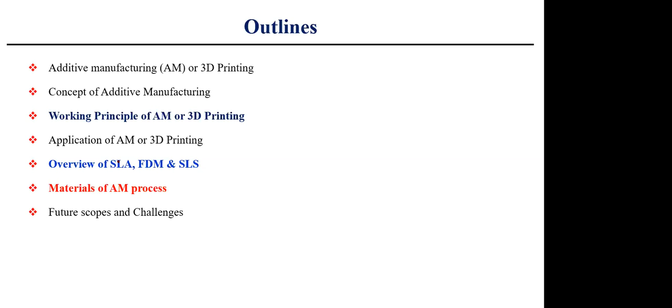Moving forward, the definitions. I hope this definition may have already been shared by other experts in the morning session. So let me just give a brief summary of what additive manufacturing is.

Basically, additive manufacturing is a manufacturing method or technique or process wherein we produce parts or develop products directly from CAD models. That is what we basically always say in the definition. Yes.

So here what we are basically doing is we are developing the model, so that refers to what is basically additive. How did this additive come into picture? Because the main idea of additive manufacturing is that we are adding the materials rather than subtractive. In most manufacturing systems, whether conventional or non-conventional machining processes, we always get products by doing some processes which remove the materials. So to get the finished products, in the case of lathe machine, drilling process, welding...

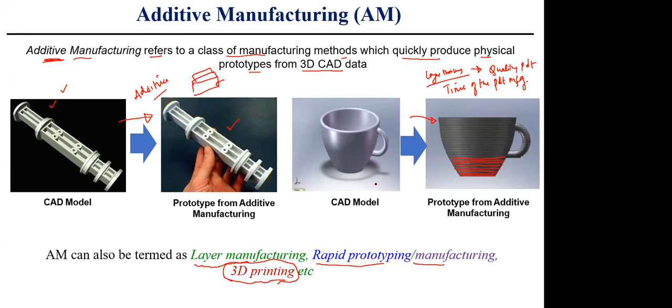So when we compare this particular new technology called additive manufacturing with conventional systems, the conventional systems may be lathe machines, milling, drilling process, welding process or sawing process, where we get the final products by removal of different materials from the objects.

Let's take this example figure shown in the PPT. This is a steel component used for carrying load applications. If you want to manufacture this object using conventional or non-conventional manufacturing systems, you require removal of some materials, meaning you need to remove materials to get the shape.

Like this shape, you also need drilling operations to put a hole. So whatever operations you perform on this simple component, you are removing materials and finally obtaining the final shape. When used in real practice, it carries the same load which you are expecting. That is what conventional systems are concerned with.

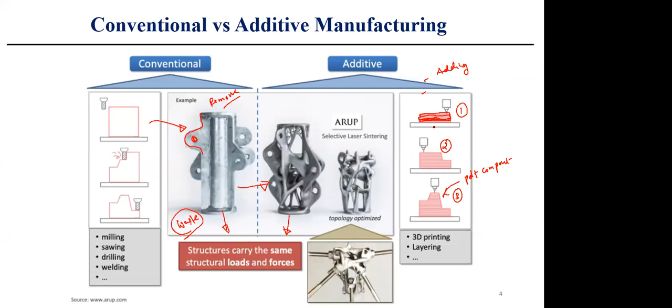The second point is wastage of materials, which we get after doing the process - we remove materials, and that removed material is waste, which is a burden in terms of cost. So that is scrap, there is waste. But in additive manufacturing systems, there is no scrap. Sometimes, if there are hollow parts, support materials are needed to develop the product. That support material is extra material needed for objects with hollow sections or some complexity.

So now, where did this concept of AM arrive from? How did the concept of additive manufacturing come into the picture? As we know, we used to do printing in everyday life.

That printing is a 2D form - a normal printer will print in what is called 2D form, meaning in X and Y directions. The concept came from the printer, which can print in X and Y direction. But only additive manufacturing systems print in the Z direction - the printer cannot do that.

In the printer, it cannot do the Z direction. It can only print the X and Y directions. That means the sketch which is on the 2D sections in X direction, Y direction can be printed. So with that, the concept of printer has arrived.

When a particular printer is able to print the material, basically 3D printing means, as the name indicates, it is printing the materials, printing the object, or printing the sketch. As the printer does the same thing, whatever you send the sketch, it prints on the 2D paper, isn't it?

So from the concept of the printer, it was thought to give another direction of printing, that is the Z direction, the height direction of the part. So with this concept of adding the height direction printing, the additive manufacturing came into picture.

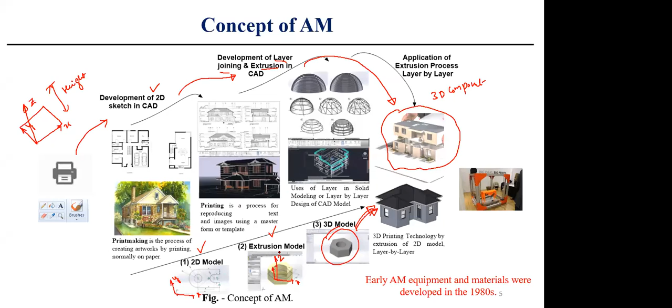The first step, in any additive manufacturing technology, is the development of the CAD model. Yes, definitely, because the input required for this technology is the model. That model is a computer aided design.

That means you are developing the computer aided models using certain software, that we call 3D software or 3D development software, like Unigraphics, SolidWorks, ProE, maybe I-DEAS, and there are several 3D modeling software. With the help of that, whatever type of design you require needs to be modeled first, needs to be designed in a particular CAD software.

Once in the CAD software, one cannot send directly to the machine, because there are certain essential steps to be followed, called the pre-processing steps before sending to the machine. So what are those? The second step is the STL conversion. That is nothing but a kind of translator or mediator which helps the compatibility between the software language and machine language.

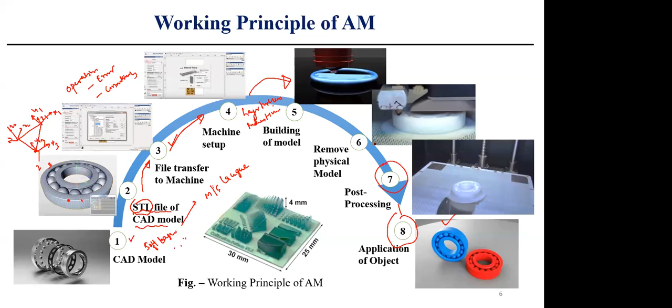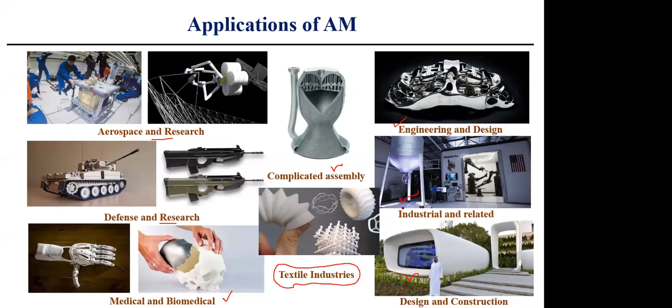We find applications of additive manufacturing in complicated assembly parts, even the textile industry, because most textile industries use the concept of additive manufacturing. Engineering design applications, wherein we carry out various types of pre-analysis of any design to take the decision whether it is feasible or not. Industrial related activities, design and construction activities, and so on. Even in the construction area, these days the concept of additive manufacturing has already been implemented.

But in most cases, if you talk about the physics of the process, it is more or less similar - what is called the same principle. The physics means adding the materials. That is the basic principle.

The source of energy might be different, but in most cases we use a laser as the source of energy to fabricate the parts. The size of the prototype depends on the size of the machine - if the build size is very high, larger products can be manufactured; if the build size is very small, smaller components can be produced.

But the one parameter which varies in almost all additive manufacturing systems is the type of material. Definitely, because different types of materials make the differences in additive manufacturing technologies. Hence, since material plays a significant role in additive manufacturing systems, 3D printing has been classified based on the type of materials.

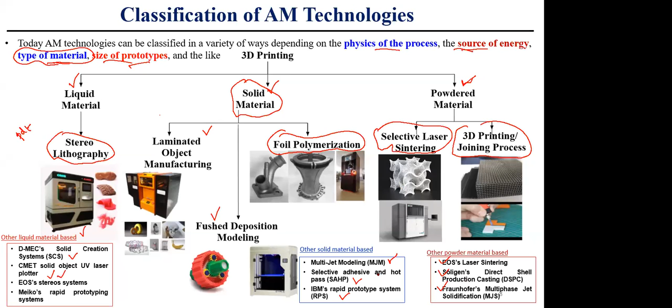Among 3D printing technologies, laser SLS printing is used in various applications. It's a user-friendly process where products are made faster and can be used directly as functional products in real practice, like other 3D printing joining processes such as binder jet process. All these processes take powder form input material to get final products, like EOS laser sintering, direct shell production casting, and multi-phase jet solidification. All these technologies come under powder based additive manufacturing.

Let me tell you briefly about the majorly used 3D printing technologies. One is from the liquid side, another is the solid side, and another is the powder side.

Coming to the liquid side, the most commonly used is the stereolithographic method of 3D printing, commonly called SLA. It was developed as early as 1980. The concept uses an ultraviolet laser for developing the product, and photopolymer resins are used, which are in liquid format. These liquid resins are kept in a particular chamber.

The laser is transferred over what is called the machine zone. When the laser is transferred, the liquid resins melt and solidify, and printing starts layer by layer upon each other. Once one layer is finished, the table moves downward to settle for the second layer, and finally once the entire model is ready, it is removed. Most photosensitive polymers are used for making the finished product.

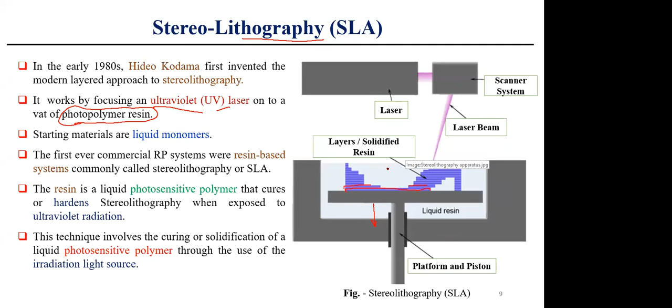Let's see how this particular technology works with this video.

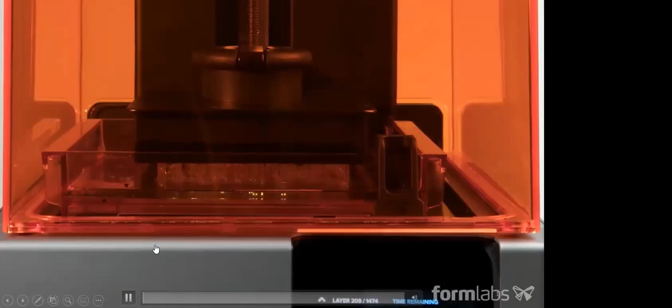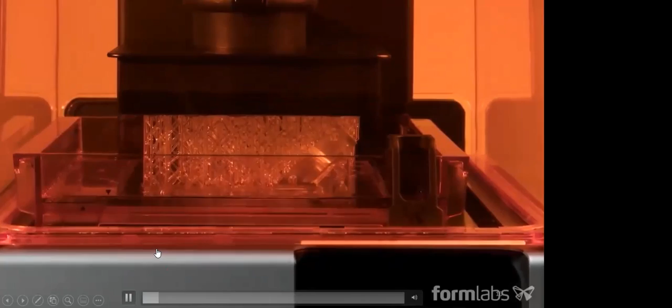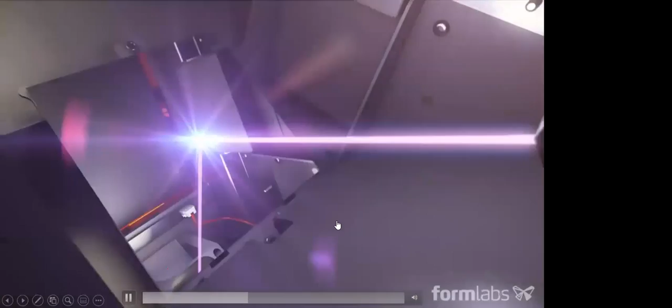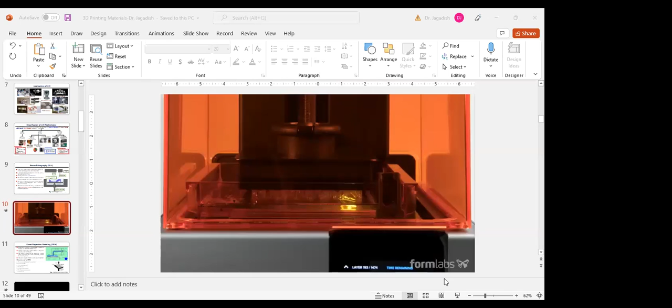Is this sound audible? Yes sir, okay it's okay sir. So this is basically a liquid resin system - this is the liquid polymer resins, and these are the components. It is lowering the build platform. Sir, the video has no sound, sir. Okay, one minute, I'll share it in a different way. Share the sound - yes, now I'll share. I hope now it is coming.

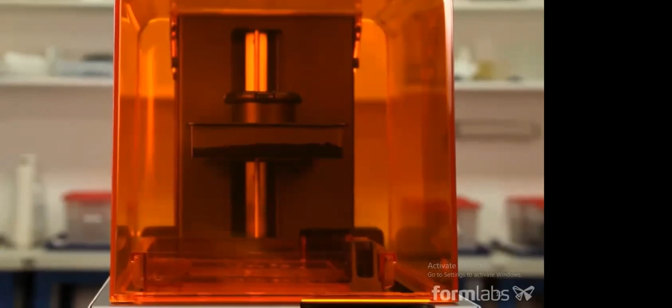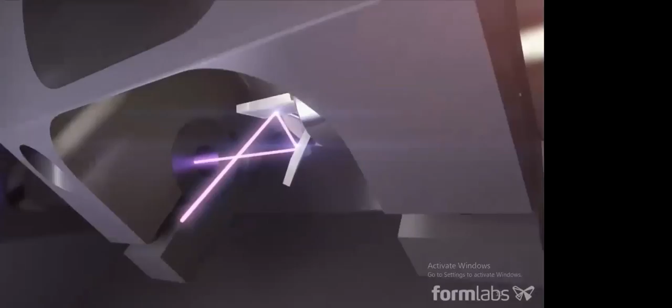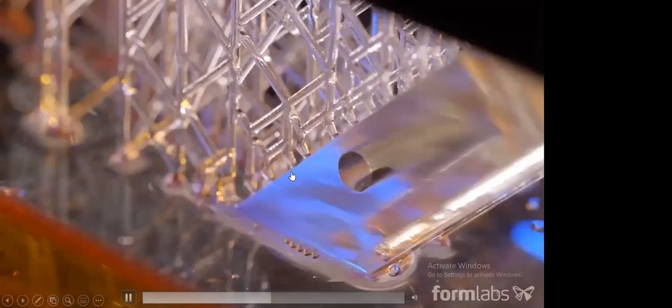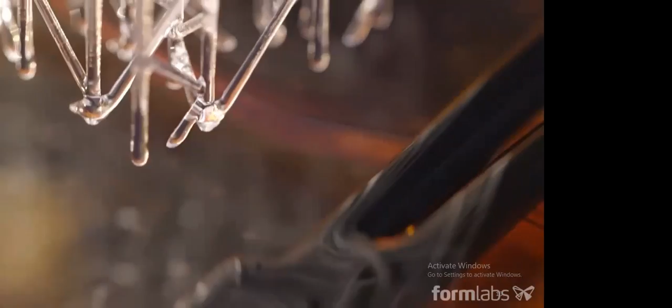Uses a UV laser to cure liquid resin into plastic. Upside down or inverted, it is the most common SLA system. Depending on the machine, resin is either poured into a tank by a user or dispensed automatically from a cartridge. At the beginning of the print, a build platform is lowered into the resin, leaving only a thin layer of liquid between the platform and the bottom of the tank. Galvanometers direct the UV laser through a transparent window at the bottom of the resin tank, drawing a cross-section and selectively hardening the material. The print is built in consecutive layers, each less than 100 microns thick. When a layer is complete, it is peeled from the bottom of the tank, letting fresh resin flow beneath, and the platform is lowered once again. Originally developed in the 80s, SLA was confined to large industrial machines until recently.

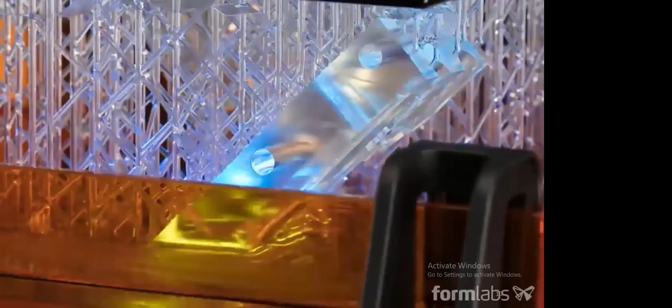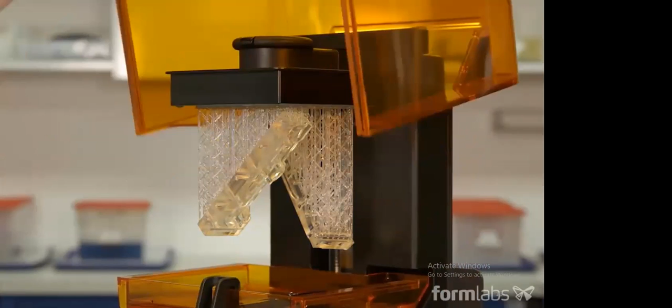Today, desktop stereolithography offers affordable, high-resolution 3D printing that fits conveniently in your workspace. SLA allows for the use of a wide range of materials with diverse physical properties, whether you're an engineer, product designer, sculptor, jeweler, or dentist. Finally, the product has been removed, and there are some supporting materials which later, in post-processing stage, we remove to get the final product.

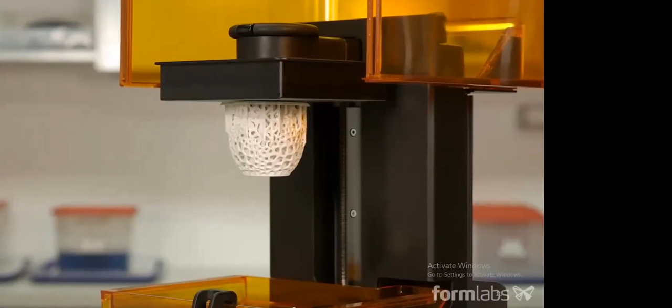Moving forward, the next most commonly used technology is called the FDM process, that is fused deposition modeling, wherein solid material is used to get products. It comes under the category of solid based models. This technology or machine was developed by Stratasys, one of the known companies in the USA. Here filament windings are used - the material is in the form of filament as a wire, fed into the heating chamber through rollers.

There will pass to the FDM head, wherein various heaters will be provided to get the products or the filaments into liquefied form. So when the wire roll is entered into what is called the head, the materials get liquefied, and then the nozzle starts extruding the material, or depositing the material over the surface. So again, similar concept here, adding the materials layer by layer.

Once one layer is over, the table will move in the downward direction, and the second layer will start, and the third layer, and so on, until the entire product is developed.

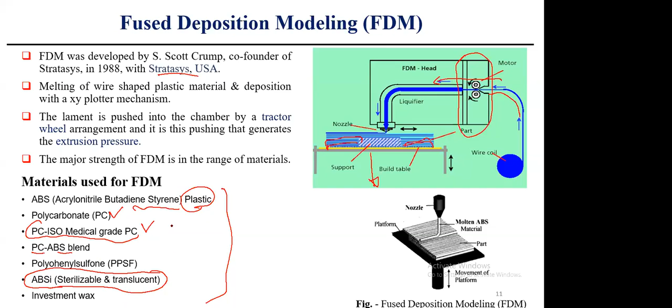So I just want to show the working principle of how it is.

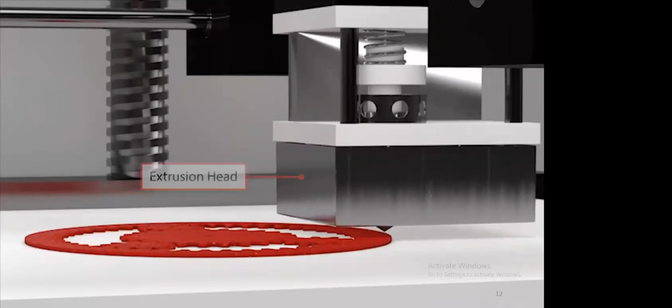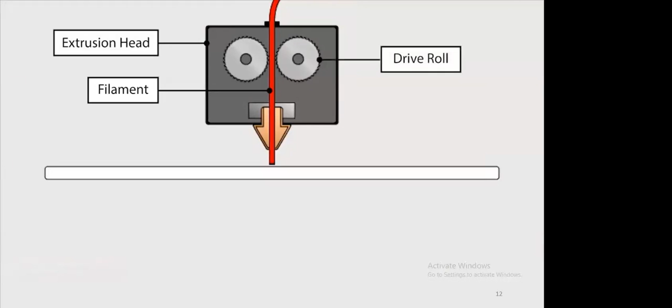Material extrusion, also known as fused deposition modeling or fused filament fabrication, is one of the most common and widely available AM methods. Material extrusion systems use an extrusion head with a nozzle to deposit build material onto a build platform. During material extrusion, a filament is fed through the extrusion head by a drive roll and past a heating element. The material liquefies and is then deposited by the nozzle onto the build platform.

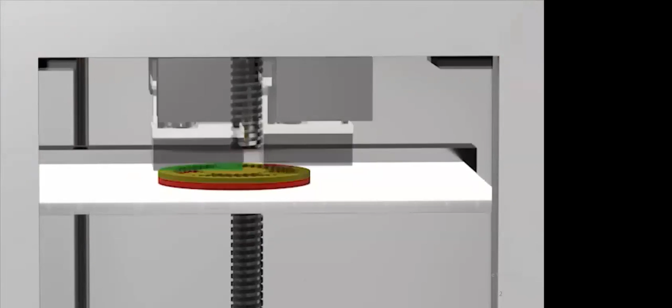The extrusion head moves horizontally to selectively dispense material in the shape of the desired part layer by layer onto the build platform. The build platform, which usually moves vertically, lowers so the nozzle can dispense a new material layer on top of the previous one. Once one layer is completed, the table moves downward, and each layer solidifies and joins with additional layers. This process repeats until the final product is complete.

Another very important method normally used in most industries is selective laser sintering. The concept involves sintering powder materials through a laser, or heat source, through which the development of the sketches or products is done.

So as usual, the same concept applies in this technology as well, where there is a bed, but the material is in the form of a powder. In the earlier case it was filament or solid form, but here it is powder form. Various types of powders are used, such as polymer powders or metallic powders. If metallic powders are used, it is called a metallic SLS 3D printer. If polymer powders are used, that is a polymer-based SLS. So depending on the type of material, the powder is selected.

Again, the concept is the same. The principle here is a sintering process, where you are sintering the powder particles to bind the powder elements one upon each other.

Similarly, the input source is transferred over the surface at which you are going to bind the powders. That zone binds layer by layer, and once a layer completes, the table automatically moves, and the wiper or rotating arm wipes away unwanted material and flattens or spreads the powder over the surface of the sketch.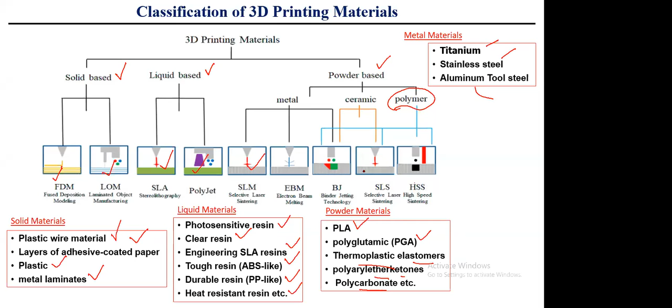That means basically in liquid materials, resin formats are used as input materials. On the powder side: polylactic acid, polyglutamic materials, thermoplastic elastomers, polyaryletherketones, polycarbonates, and so on. Some metallic materials are titanium, stainless steel, aluminum, tool steels, etc. And even other materials like ceramics, sand, elastomers, etc. are also used in most additive manufacturing technologies.

Let's see one by one the different materials which are most commonly used in 3D printing. The first and foremost is plastic. We all know most 3D printing technologies use plastics.

Various types of plastic materials are available for printing 3D printed objects. But availability doesn't mean I can use any material - depending upon the type of application, type of complexity of the product, and the need of the product, the corresponding plastic material will be selected for that particular product.

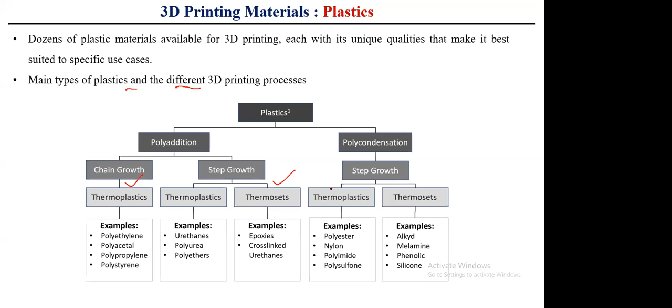So mainly, depending upon the types and different 3D printing processes, we select the type of plastic material to get printed. But in most cases, we basically use thermoplastic and thermosetting plastics only in most 3D printing technologies. The first is ABS material.

As we all know, ABS is acrylonitrile butadiene styrene. This is a very commonly used plastic material in the form of filament as well as in granule form, used as 3D printing material in 3D technologies.

Why? Because it has good impact resistance properties. Wherever you need good impact resistance, one can use ABS material. It also provides good strength and moderate flexibility, and is easy to extrude from the printer nozzle - that's one of the plus advantages of this particular material, ABS.

As you can see in this figure, it looks like this in the form of filament as well as sometimes granule form. The temperature range it can withstand is around 210 degrees centigrade, up to 250 degrees centigrade on the high side.

Most applications include printing of plastic automotive parts, moving parts, musical instruments, kitchen appliances, electronic housings, various toys, etc., where this ABS material is used. Other applications include traditional manufacturing like plastic wrap, water bottles, cups, and so on. These are the applications where ABS material is used.

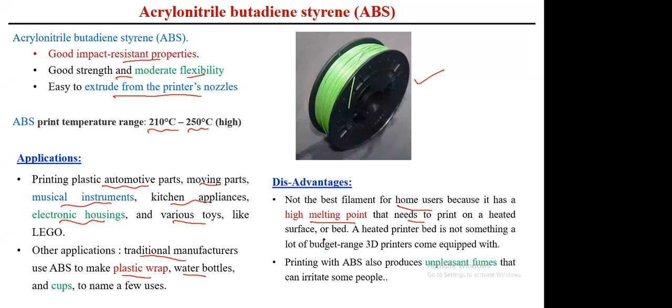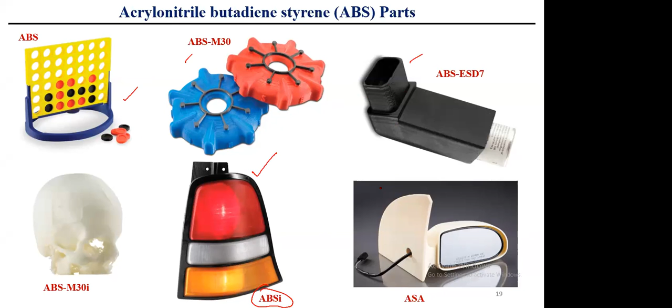These are some branches of components produced by ABS plastic. This light component is made by ABS. It is a special type of blending of ABS with other components to enhance strength. So like ABS pure, ABS M30, these are covers, and this material is ABS ESD7. There are various grades of ABS used for making different products for different applications.

Next is PLA. PLA is another important material most commonly used in most applications, in most areas. Why? Because it has advantages like good impact resistance, good strength, and moderate flexibility.

It is very easy to extrude through print nozzles. That is one of the beauties of this material. The temperature it carries is around 180 to 230 degrees Celsius only. It looks like a filament form, but sometimes we may get it in granule form also. PLA is also used in granules.

So which methodology or technology will be used for these materials? If it is filament, one can use the FDM process. If it is granule or powder form, one can use SLS. Applications of PLA materials include medical stitching.

In medical applications, including surgical implanted pins, these pins are manufactured using PLA, along with surgical rods used in medical applications. Some small screws, mesh, or consumer items are also made using PLA. Other applications include food packaging materials, disposables, tableware, or diapers, all manufactured using this PLA.

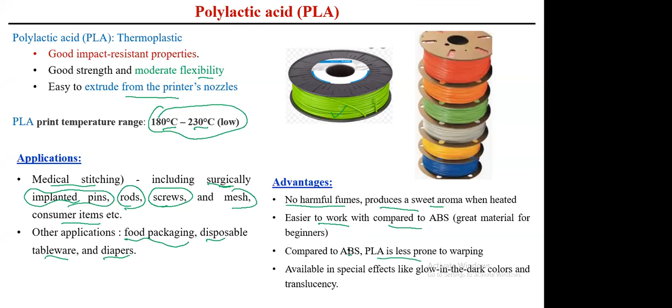Compared to ABS, PLA is less prone to warping, obviously, because it is environmentally friendly and obtained from natural resources. Hence, PLA is the most commonly used material in most applications.

The next material is PET, that is polyethylene terephthalate. This is also one of the most commonly used materials. Why? Because it is compatible with lower printing temperatures, meaning at a lower temperature there is faster production process.

Humidity and chemical resistance capacity of this particular material is compared to PLA and ABS. High transparency, one can go for food safety, meaning it can be food safe in this material. That means if you are placing any food in boxes made by PET, your food is not going to be poisoned.

So it is a food safety material, wherein your food stays in very good condition. What temperature range can it carry? Approximately 210 to 230 degrees centigrade. The applications are waterproof applications, snap fit components like cups and plates, etc. As you can see in this figure, there are various applications of PET plastics.

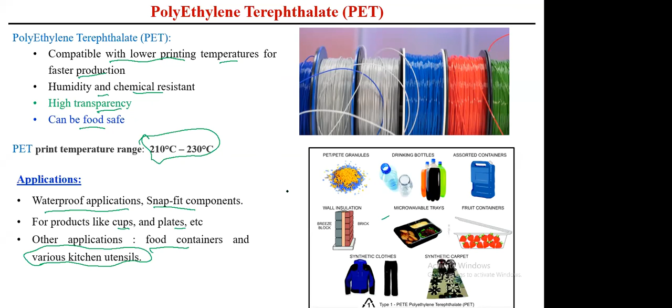Foods containers and various kitchen utensils are also made using this material. So one can say that PET material is basically used in most of the consumer side food industries. That is the beneficial side, because if you keep your food in a box made of PET, your food will not be damaged or poisoned. This PET is available in granule form as well as filament form, and it is a solid based material. Hence the FDM process is best suitable for this material.

Next is PETT, which is an additional grade of PET, where a trimethylene component is added into the PET to give a glassy filament type structure to the filaments, called T-Glase filaments. That means it looks like a glass type of thing, but it has greater strength compared to PET.

It is non-biodegradable, and this material is developed from some natural resources. High transparency, yes, when made with this, it has transparency where one can see the products inside the box or something like that. So transparency is there. This material is also best suitable for food applications, and more or less the temperature range is similar to PET, so the properties of PETT and PET are similar.

One can expect that this material will also be used in FDM, because it is in filament form, for various applications like food. It will be used for various food containers and other kitchen utensils only, because it is non-biodegradable, and hence it will be preferable to use for food applications.

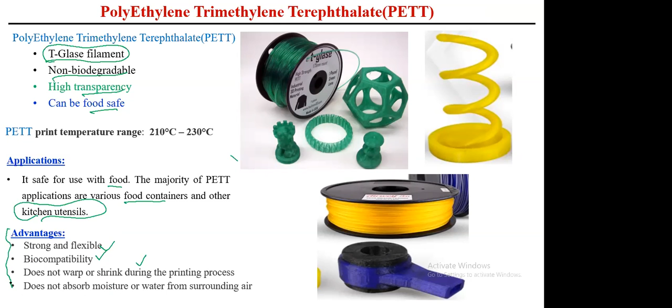So next, some of the advantages we get by this methodology: this material is very strong and flexible, biocompatible, and does not warp or shrink during printing, and does not absorb moisture and water. That is the plus point of this material. Hence, with these plus points, this material will be used in food applications, and it will be printed by the FDM process.

Another important plastic material normally used in 3D printing applications is nylon. We all come across and know about this material. Nylon is the most commonly heard of and usable material in most industries, and in daily life we use or feel products made by nylon. Why? Because nylon is a material which is very strong in nature, durable, and light in weight. That is the advantage, and also tough and partially flexible - not fully flexible, but partially flexible.

It has heat and impact resistance - when there is an impact force, it can also resist it. And it is very complex to print, meaning various complex components can easily be printed using nylon. Nylon is in the form of granules or filament form, so therefore nylon materials can be printed using the FDM process. More or less the temperature is also almost in a similar range of 210 to 250 degrees centigrade, similar to most plastic materials.

But on the higher side it may go according to the additives in the filament. Again, addition of different materials to get different grades of nylon gives different ranges of temperature withstanding. So as such, this material is also a solid based material.

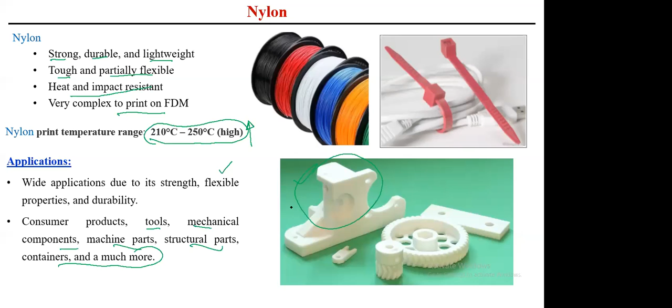So FDM process will be used for printing of some of the components. As you can see in this figure, these are some clips, some gears, some plates, some structures like a vice structure, or casing structures, printed by using nylon. If you talk about the applications, wherever you need greater strength, flexible properties and durability, in that case we should go for using nylon materials instead of ABS and PLA. Consumer products like tools, mechanical components, machine parts, structural parts, containers and many more will be developed using this nylon. So the nylon products related to tools and all can be directly manufactured and used in direct applications.

Next is PVA, another plastic normally used in the FDM process. That is polyvinyl alcohol. So as the name itself suggests, it is typically used as support material. This material is not used for printing the main part, but it acts as a support material, because some of the hollow components of the products need some support material. After producing the parts, the support material will be removed and the products super finished to make good quality. Somehow the support material is needed, and in such cases, most of the support material used is PVA.

When printing with ABS and PLA, PVA will be used in combination with ABS and PLA. PVA works best with printers that have a dual extruder, meaning two extruders are required in this case, one for PVA and another for PLA. So combinedly it will be printed. Whenever support material is needed, that will be printed by PVA, and whenever the main component is to be printed, that will be printed by PLA. So this works using a dual extruder.

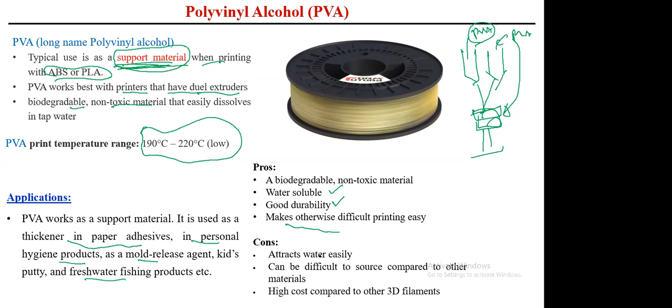Am I audible? Yes, sir. Yes, sir. Yes, sir.

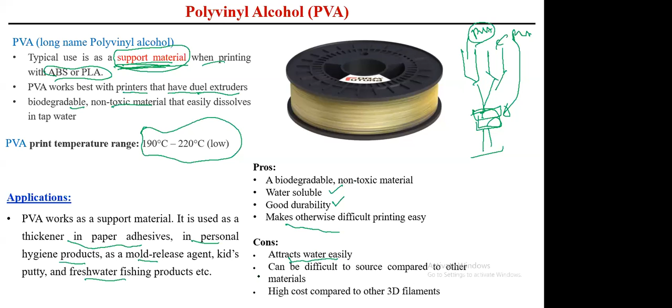It attracts water easily, and can be difficult to source compared to other materials, and has high cost compared to other 3D printing materials. Another useful material is the sandstone filament, which is an addition of PLA plus brick. This material is well used in most applications, and it's a blending of PLA plus brick materials. The brick coating over the PLA gives the feel of stone colors and textures. This material adds surface characteristics, and during printing, the extrusion temperature it can withstand is approximately 165 to 210 degrees Celsius.

From an application point of view, this can also be used in various applications, like wherever you are adding some color and structures to the components, such as architectural monuments and components where you are adding textures or colors to products for making decorative items. We use this kind of filament or material, as you can see in this figure. This is also available in filament form, and the materials printed are used mostly for architectural display models or ornamental models.

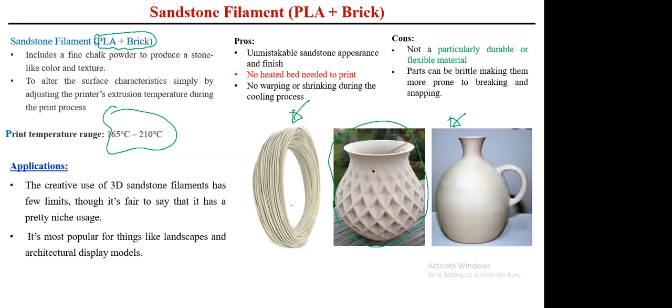There is another material, wood filament, basically used as another material option. Normally this is not truly wood filament, but it's basically PLA coated with some wood structure and color. In most cases people confuse it as being made by wood. No, it is a PLA filament coated with some wood texture.

That's why this is also useful for making functional products and toys for kids. Applications of wood filament are mainly for creativity purposes, decor items, ornament boxes, tables, chairs, and other toys for kids, wherein the customer will feel that this is basically made from wood. So the texture is given over the surface of the PLA or ABS or other materials to feel the wooden properties.

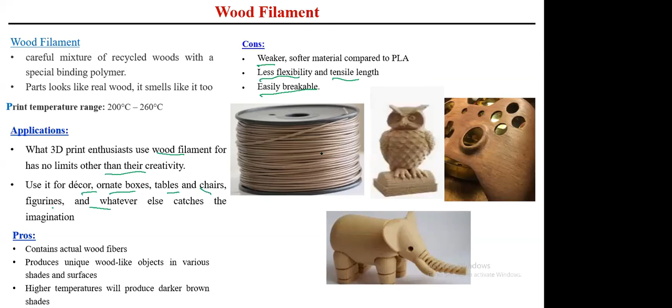The temperature it can withstand is approximately 195 to 220 degrees Celsius. The applications are again similar - educational tools, making various DIY projects, sensors, and educational demo models for students, wherever you want to show iron particle type components.

But apart from the benefits, there are some limitations of this material. The nozzle temperature needs fine tuning because the iron particles, being powder material, have a melting point different compared to the PLA, so temperature needs readjustment. It's sometimes inflexible, and the material is more expensive compared to other popular filaments, obviously because we are adding another element which enhances the product.

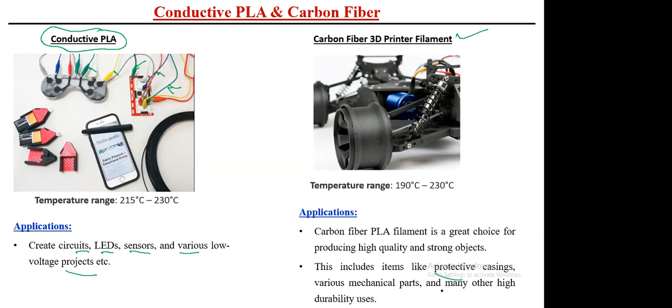And many other high durability uses, where durability is a major concern. In that case, carbon fiber 3D printing materials will be used.

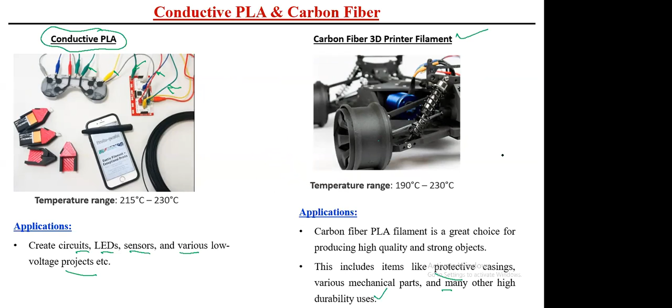Moving forward, next is flexible TPE and Amphora filaments. This is another plastic material used in 3D printing, known as thermoplastic elastomers, or flexible TPE. These are elastomer materials, wax kind of materials, used for making various household appliances, automotive sectors, popular kid toys, wearables, and smartphone cases.

And next is commercial and medical applications like medical supplies, weather seals for windows and doors, electrical installations, and soles of footwear—all made using these elastomers.

Next is the Amphora 3D printed filaments. This is a very durable material again, very good for printing lightweight materials with higher resistance. All toys, dummy models, and decorative models of various products are developed using this 3D printing material. We get excellent strength in Amphora 3D printing filaments, high flexibility, and durability as well.

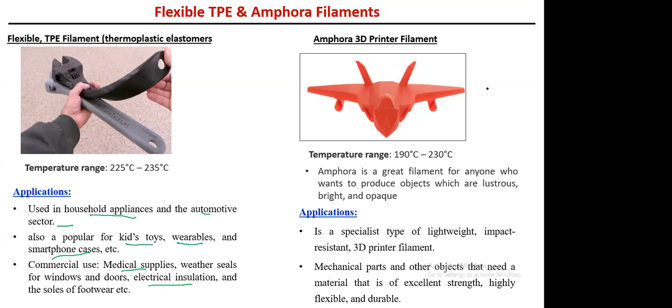Moving forward to metallic filaments—whatever I've shown you so far are all plastic materials in filament form, used most probably in the FDM process. Some metallic materials or filaments are also used in printing 3D printing components.

One of the most important filaments used on the metal side is stainless steel. We all know stainless steel has wide applications in most industries. There's a grade called 316L stainless steel, which is most commonly used and is the most affordable material in the 3D printing zone. It's available in filament form as well as powder form.

Applications include tooling purposes, where you make different molds, core cavities, jigs, fixtures, and other functional parts where durability and resistance are important. For components in corrosive environments requiring high mechanical strength, this type of stainless steel print material will also be used.

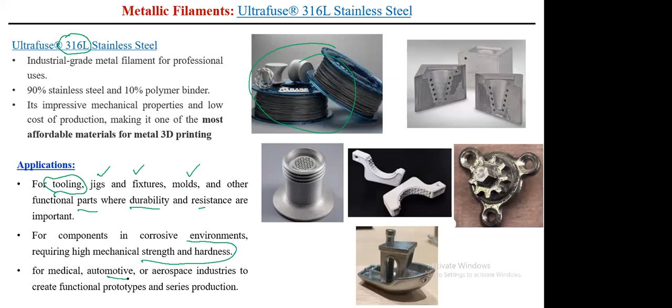It can also be used for medical, automotive, and aerospace industries, to create functional prototypes and series productions. So these are some of the branches where metallic filaments can be used for printing.

This is what I mentioned—there's a tooling industry where one can develop a stainless steel mold using 3D printing, maybe FDM or SLA. This is a component, this is one more component, this is one more component—all made by 3D printed materials.

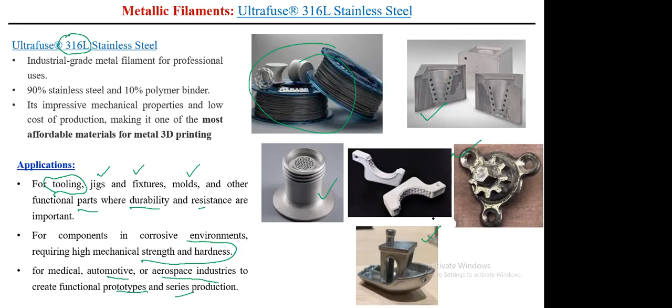What are the applications? Aerospace, aviation, automotive, and medical—most cases like tools and jig fixtures in all these areas can use these materials to print objects. For example, this object is printed using stainless steel 17-4PH, also available in filament and powder form. And this is turbine blades and gears manufactured using this stainless steel.

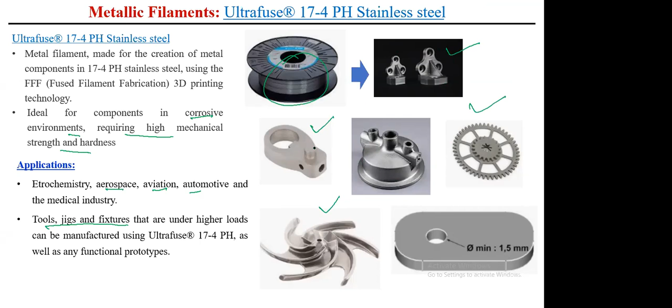Another important metallic powder, available in powder form, used for the SLS process to print materials, is aluminum with a different grade—AlSi7Mg0.6. This material is aluminum 90%, silicon 7%, magnesium 0.6%. It's available in powder form and can be printed using selective laser sintering, and has good mechanical properties, usable for parts subjected to high voltage.

It's durable and lightweight, very low weight, and effective in areas where strength-to-mass ratio and good thermal properties are required. Whenever you require this property in any application, one can use this particular material as a 3D printing material for your product. From an application point of view, it's more or less the same as for stainless steel.

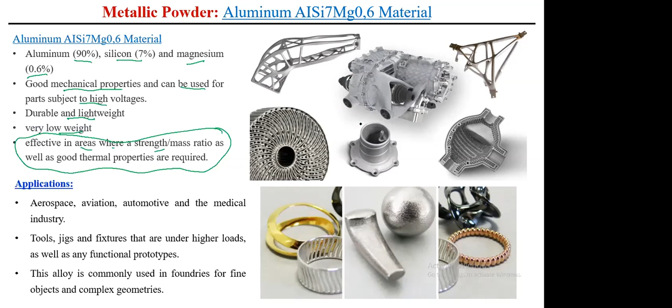One can use this material for printing various components for applications like aerospace, aviation, automotive, and medical industries. Also some tools, tool jigs and fixtures, and materials which carry higher loads. As one can see in these figures, different types of components are manufactured by aluminum materials printed by the SLS process.

Next is the metallic powder, titanium Al-4V. This is a very common material we normally use, available in powder form, hence one can use only the SLS process for printing this material. This is having titanium around 88 to 90%, aluminum around 5 to 6%, and vanadium 3.5 to 4 percent.

The beauty or major advantage of this material is it is hard and highly resistant to oxidation. With these advantages, one can handle or withstand this material up to around 1660 degrees centigrade, or around 3260 degrees Fahrenheit in temperature.

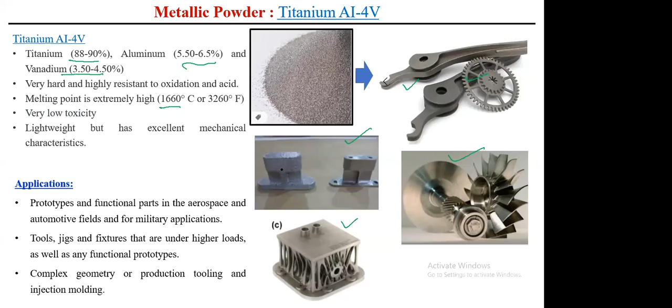There is another metallic powder called copper, which is used in the SLS process for printing various materials. This copper is normally used for thermal and electrical applications, because copper is a good conductive material, so it is used for thermal management applications in most cases.

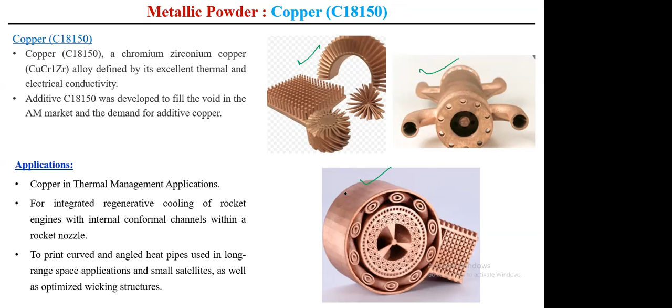As you can see in this figure, these fins are developed by copper, this is a casing developed by copper, and this is another very complex structure component. This complex structure cannot be manufactured using conventional machining systems; casting is one option, but the best replacement is additive manufacturing, where such complexities can be achieved. Most of these copper components are used for thermal management applications.

There is a metallic powder called steel bronze, a blending of bronze and steel. This blend has significant advantages and is used in various applications due to its strength and resistance. Adding bronze to steel increases the strength of the steel, so wherever higher strength materials are required, this material is normally used.

But in most cases, this material is used for decorative items and ornaments, like jewelry or decorative items kept for showcase purposes to show visitors.

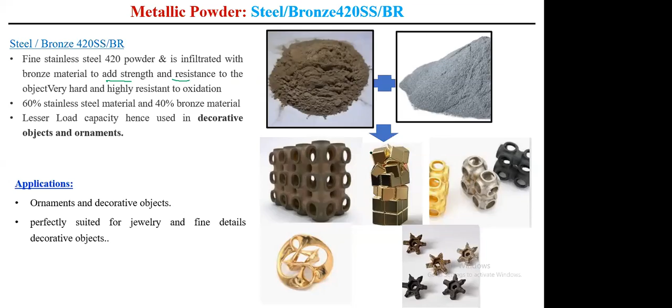Another metallic powder is bronze 3D, which is 90% copper and 10% tin. This material is used for jewelry applications where different types of very small components are manufactured, such as rings, pins, lockets, or any jewelry parts manufactured using these materials.

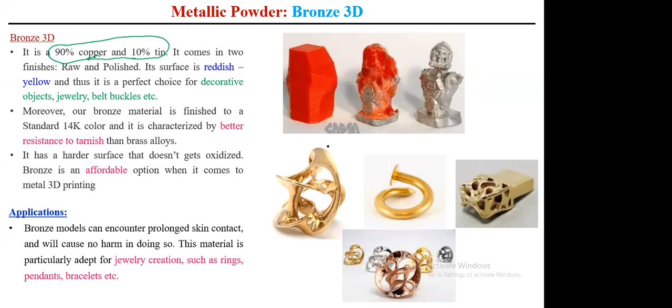Another powder material is stainless steel 316L, in powder form, unlike the previous one which was in filament form. This similar material in powder form can also be used for making different types of stainless steel products where higher strength is required, such as tooling, molding, injection molding, automotive, or aerospace applications.

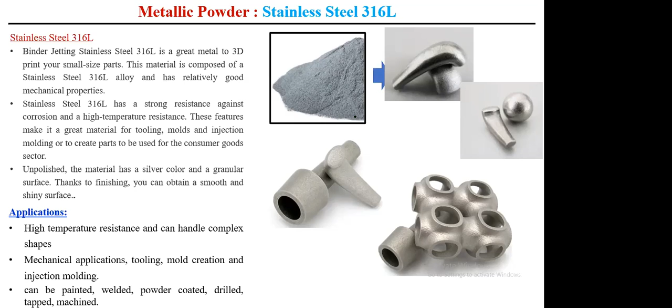Another is a polymer powder, nylon PA12, an additional grade of nylon for durable materials. This material is polyamide 12 nylon, available in powder form. Hence, the technique used to print this material is selective laser sintering.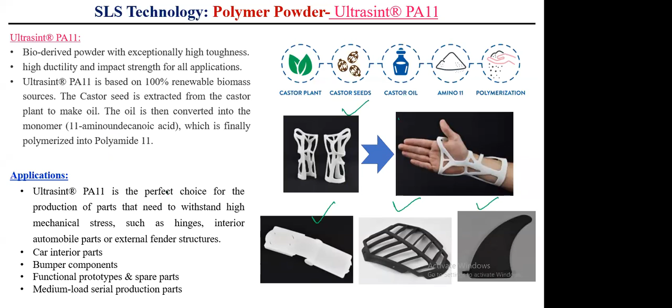Another biodegradable material is a polymer powder called PA11, a polyamide 11 grade. It is based on the castor plant, castor seeds, extracted from castor oil. Since it is extracted from nature, this is called a biodegradable polymer or biodegradable material. Obviously, when there is a biodegradable material, one can use it for medical applications, for hinges, for some support materials, and for other critical components used in medical applications. This can also be used for various medical as well as exterior automotive applications. So this is a biodegradable material.

Another material is nylon 3200 glass filled, which is a next grade of nylon material where you add glass fibers as a filler material to get higher strength components on the nylon side. There are various grades of nylon available, and I've gathered a few important applications of nylon materials to explore here. Various types of nylon grades give various types of properties for different grades and applications. The glass filled polyamide has glass finishing structures added to give glass finishing structures to the surface of the component and also to increase the strength of the component.

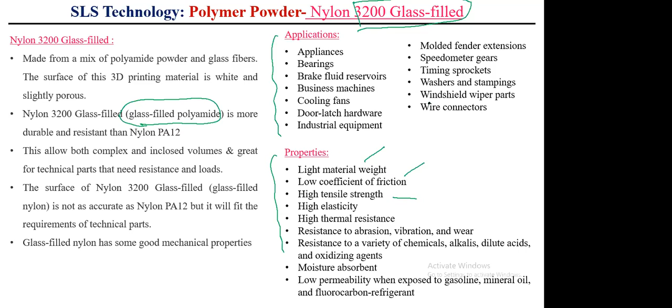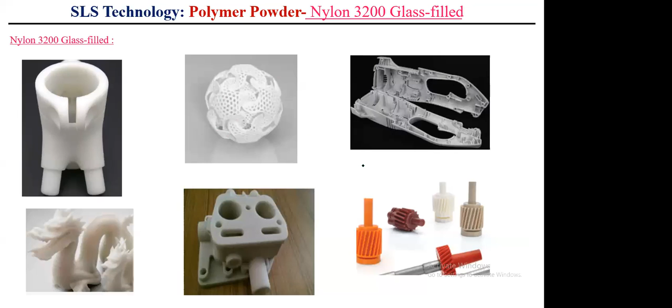These are some of the applications where this material will be used, and these are some of its properties. It is lightweight, has a low coefficient of friction, high tensile strength, and so on. With these properties, here are some real examples already made with this nylon 3200 glass filled material. These pictures show materials printed by SLS technology using nylon 3200 glass filled.

Another powder material is called Windform, Windform XT 2.0. Windform is a very high durable and high strength material, specifically used for sports applications, like headlight covers of sports cars, the casings of Formula engine cars, and prototype models for aircraft. These are dome covers of components which require very high strength.

All these materials undergo the wind, meaning when traveling at very high speed, they experience very high wind velocity. Under those circumstances, they must withstand that capacity of forces. For that purpose, the industry developed a material called Windform XT 2.0, a high-tech material for additive manufacturing chosen by those working in motor sports, which allows fully functional applications as well as bench testing, wind tunnel testing, and racing on the track. It is best suited for functional applications not only in motor sports but also in automotive, aero components, UAVs (unmanned aerial vehicles), aerospace and designs.

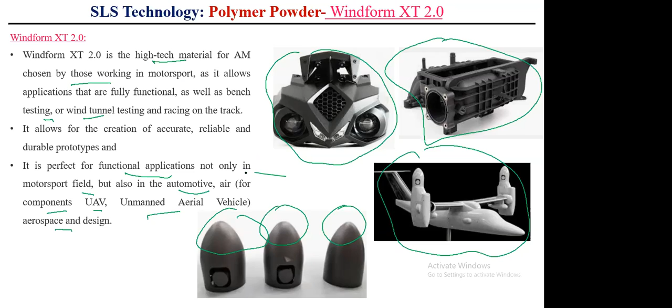Next are other materials. In addition to filaments, plastics, and metals, there is another zone of materials used in 3D printing technologies: sand 3D printing. This means sand is used as a printing material for printing different sand products. Most commonly, sand 3D printing or silica sand is used for printing materials, in addition to other materials also being used. This is used for making the core and cavity of molds. Most applications are for core and cavity, in the form of sand, which has different properties to withstand the required capacity.

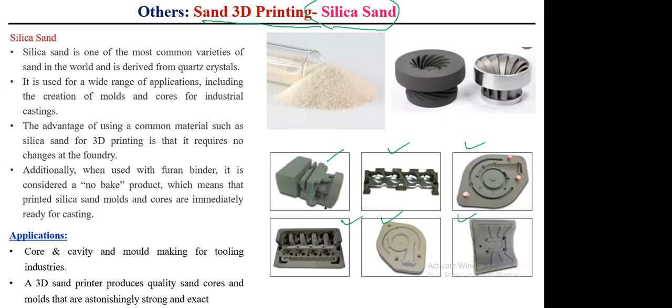These are some of the samples we can see where sand casting or sand printing is a technology used for printing these materials.

Another is TPU 92A elastomer. You can see this is a spring type of spongy material. When you press it, it comes back to its original position, press again, release again, it returns. This kind of material is basically TPU, an elastomer. It is a kind of polymer material having similar properties to elastomer, but very flexible at room temperature, while still remaining dimensionally stable.

So when you apply force, it presses, and when you release it, it comes back to the original position. This type of high quality elastomer is used in making damping elements like bumpers, bellows, soles, handles, hoses of different components, casings, etc.

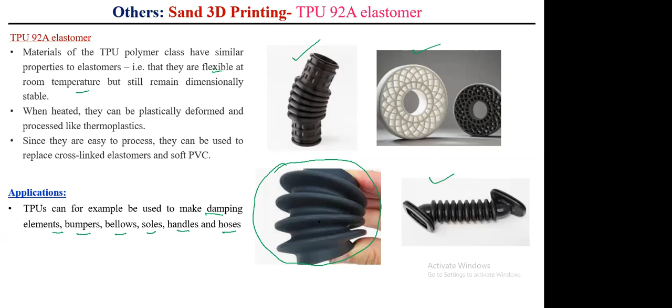So this is one component. You can see this is another component, and this is another component, all made by TPU 92A elastomer. So this is the other type of material.

Another material is ceramic, one more widely used material in 3D printing, with various types of ceramics. As we all know, ceramic has very high heat resistance, insulation and corrosion resistance, able to withstand higher temperatures and being very insulating. Wherever this kind of application is needed, ceramic materials can be printed using different products. Some of the figures you can see here.

But in ceramic printing, there are various types of ceramic printing technologies available. If it is slurry-based ceramic, one can use stereolithography, digital light processing, two photon polymerization, inkjet printing, direct ink writing, etc. If it's powder, then three-dimensional printing, laser sintering, laser melting. For bulk solid-based, it's laminated object manufacturing and the FDM process.

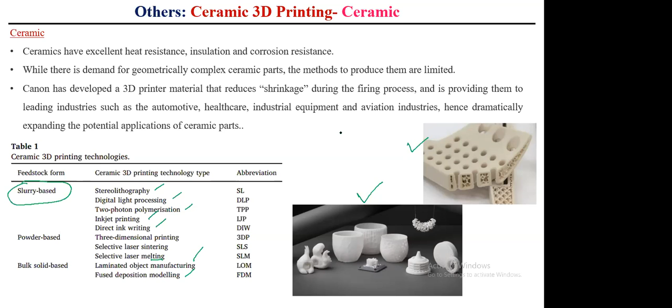So the manufacturing technology will be the same, but the material is different. What I'm trying to say in every slide is the manufacturing technology is the same, but the materials are different.

Another material is CastForm, one of the most widely used in casting applications. In casting application, it is basically PS and SLS, polystyrene used by the SLS process, a kind of wax material. It is a styrene based expandable pattern casting material, compatible with most standard foundry processes.

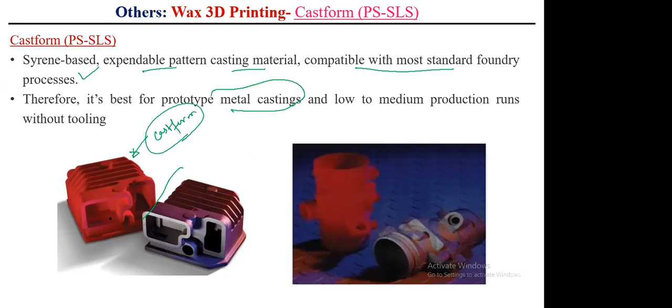Only foundry applications use this material, and it is the best prototype material for metal casting purposes. You can see this engine casing is manufactured, made by Castform material. So the engine casing is made, and later the material is deposited in this, and finally you get the engine casing you require, for low to medium production runs without tooling activity.

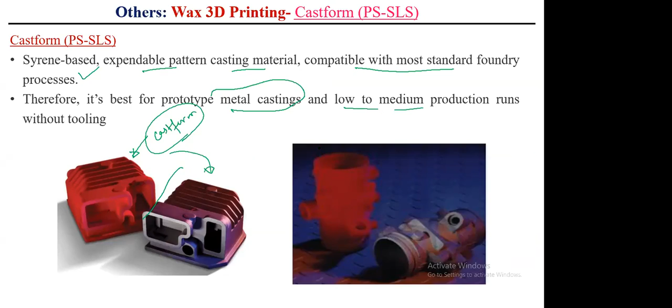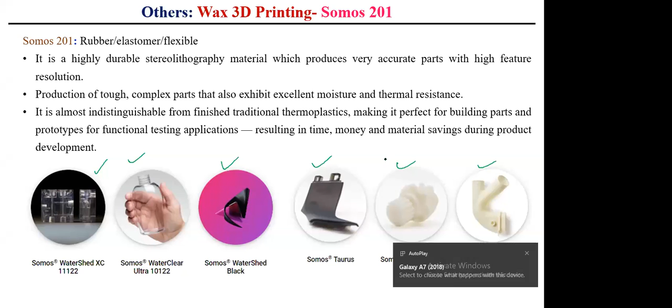Coming to the future directions, what are the future directions in this particular area of 3D printing materials? There are various zones one can work in within 3D printing materials. I covered almost all the materials used in 3D printing for different applications. But material is a very broad classification, with various grades, properties, temperature ranges, and applications.

But I tried to cover most of the common materials used in 3D printing applications or 3D printing technologies. So coming to the future directions and challenges, what are the fields wherein the work is still left to be explored by researchers?

They are advancement in additive manufacturing. One can recall when I showed the classification of AM technologies, most of the technologies are the traditional way of physical process. Hence there is a need for advancement in technologies where one can make the process faster. Obviously these additive manufacturing systems are very fast, that's why it is called rapid. But still, there is a lacuna in each and every process that needs to be enhanced, explored, and advanced to make the manufacturing system faster.

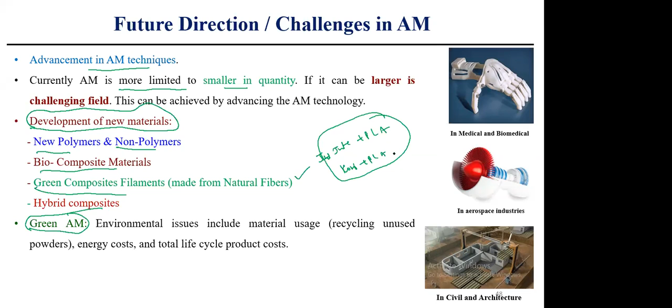So this is another area one can think of working in - green additive manufacturing or green 3D printing. With this, I conclude my talk today, and I hope I covered almost all the materials normally or most commonly used in additive manufacturing systems.